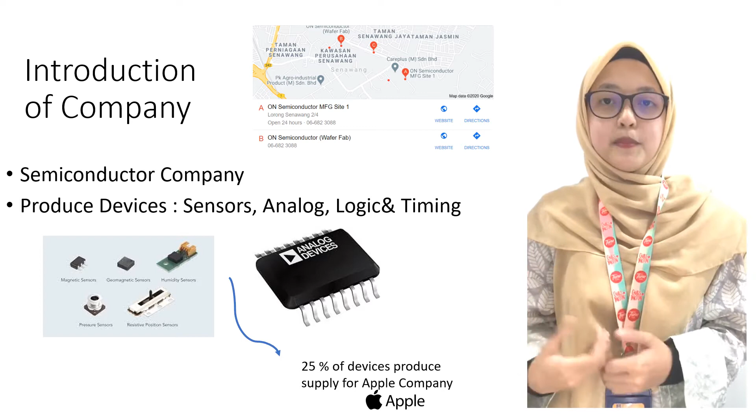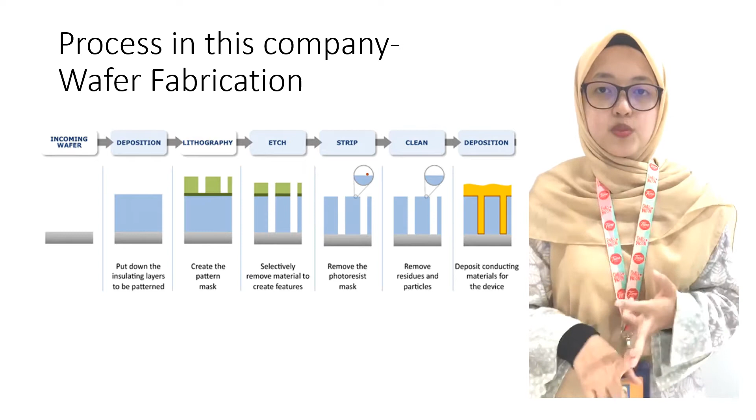For the wafer fabrication process, it will undergo 6 smaller processes, which is the deposition process, lithography process, etch process, strip process, clean process, and back to deposition process.

In On Semiconductor Malaysia, a few facilities have been provided, such as toilet, drinking water station, lockers, and even cafe for a place to rest. These facilities are a way that can give comfort and ease to the employee, and also a way to show that the employer cares for the employee's welfare.

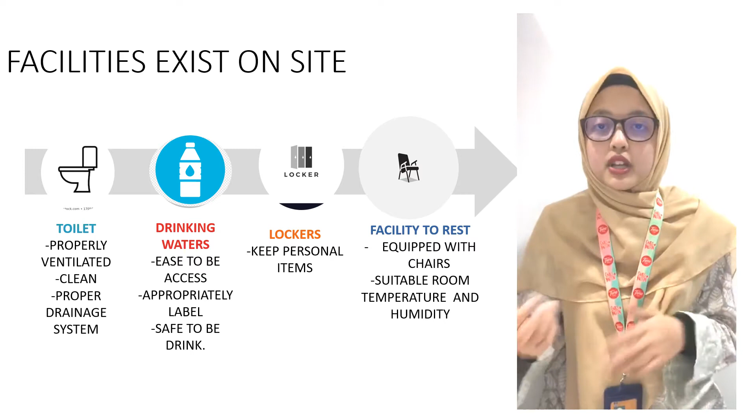Let's take a look at the hierarchy of control measures used in this company. Let's start with the least effective first, which is the PPE. Different job scopes are going to be provided with different personal protective equipment.

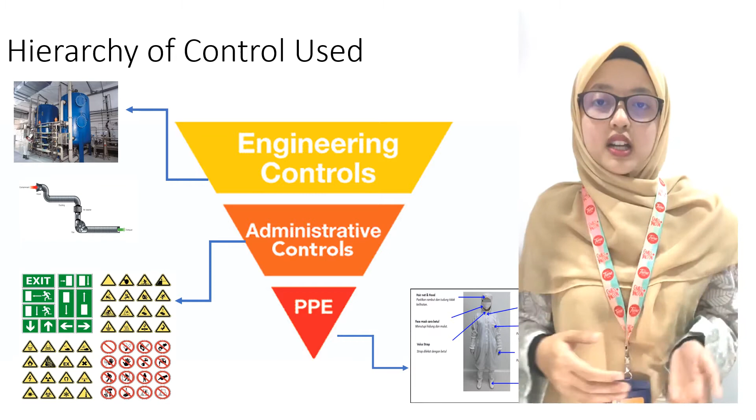The second one is the administrative control, where the company introduces short breaks, provides training, and also puts out safety signage for the employee. The third one is the engineering control, where the company introduces a water waste treatment plant and also a local exhaust ventilation system to reduce the hazard and risk.

Based on the regulation and acts that have been used in this company, the first one is the Occupational Safety and Health Act, where it is more emphasized on the noise exposure produced by the machine, which might affect the employee or the workers.

The second act is the Environmental Quality Act, which concerns the wastewater produced during their production process, which might affect the Malaysian waters or the environmental waters.

The third act is the Fire Service Act, where the water that is stored in the fire tank is only for the purpose of firefighting equipment system only.

And the last act is the Factory and Machinery Act, where one of the emphasized points is regarding the fencing of machinery - machinery using cutting blades needs to be fenced, in order to avoid any incident happening while the machine is running.

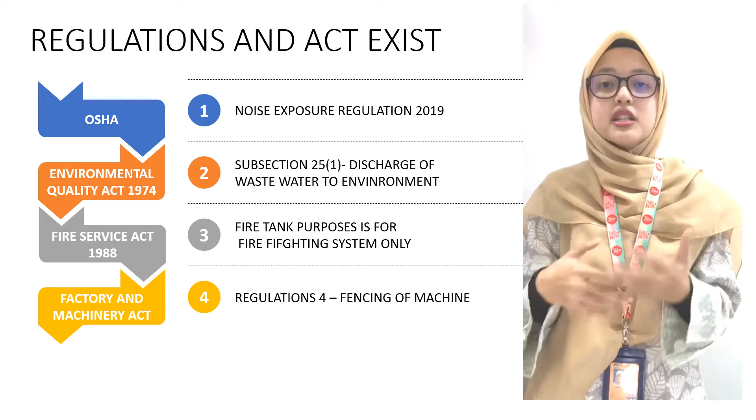There are 5 types of hazard. The first one is the physical hazard, where it is more emphasized on the noise and the temperature of the room in the production area.

The second hazard is regarding the ergonomic hazard. It's about the body posture of the operator working, where they have to stand over 12 hours, which may lead to back pain.

The third hazard is the chemical hazard, where certain job scopes require employees to change the pump and filter, which may expose them to chemical handling, needing an eye wash or even shower wash after the changing activity. The next job scope, the fourth hazard, is regarding the electrical hazard.

There's a situation where employees need to change the AC and DC power supply, which might expose themselves to the risk of getting electrical shock.

And the last hazard is the biological hazard, which is usually seen in the company clinic, where a worker who is sick comes to the clinic to ask for treatment. This is where there's a possibility that the nurse can be infected with the virus brought by the workers.

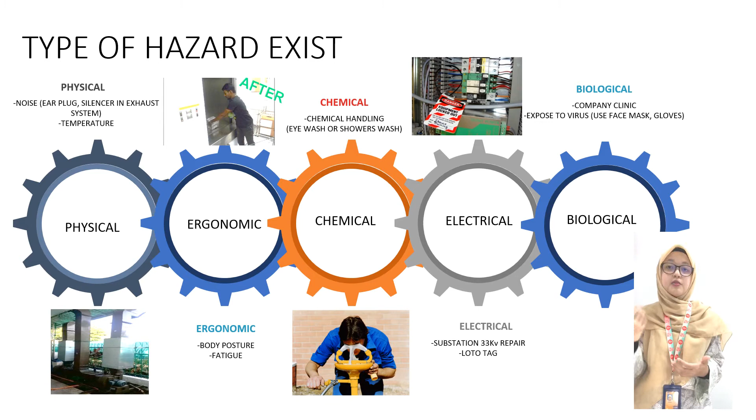Emergency procedure, if there is any situation happening - for an example, basically the procedure is all about the same, where the first step is when there is an emergency, security will call the facility to confirm whether the emergency is true or not. If it is true, it will proceed to call the local authority, either the fire brigade or hospitals, to get help regarding the emergency procedure.

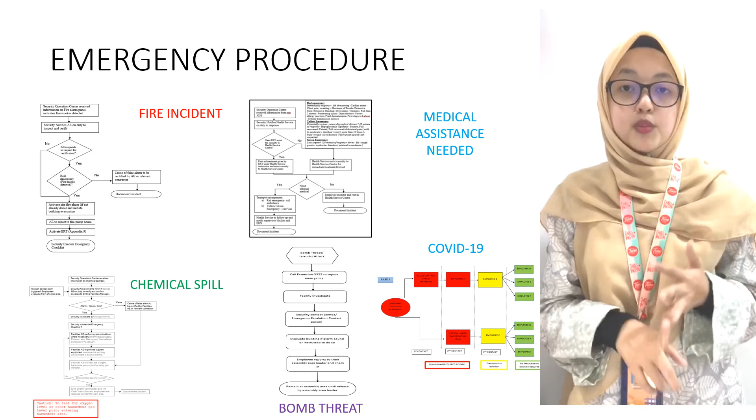So in this slide, I've prepared 5 emergency procedures, which are the first one fire incident, medical assistance needed, chemical spill, bomb threat, and even COVID-19, which is the latest situation in our country.

Last but not least is about the job scope of the environmental safety and health engineer. Environmental safety and health engineers are going to do daily and routine enforcement and also create awareness and training programs for the employee.

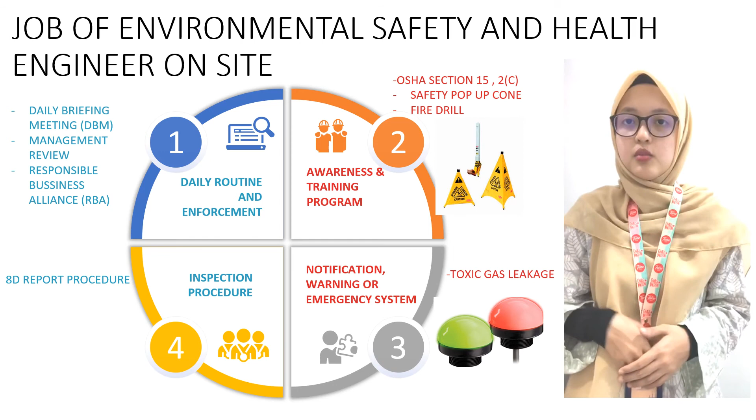They will also create a notification, warning, or emergency system to acknowledge if there is any emergency, and also create an inspection procedure by doing the 8D reports.

The ESH engineer also provides safety personal protective equipment based on different job scopes in that company, and also provides vouchers from the employer as a gift of appreciation to the contractors or workers in that company who have fulfilled their job.

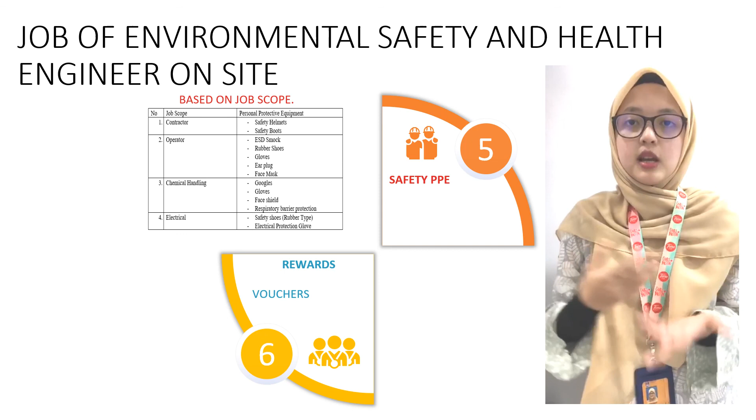So in conclusion, On Semiconductor has completely complied with all the acts, in order to ensure the safety of the employer and the employee is in a good condition.